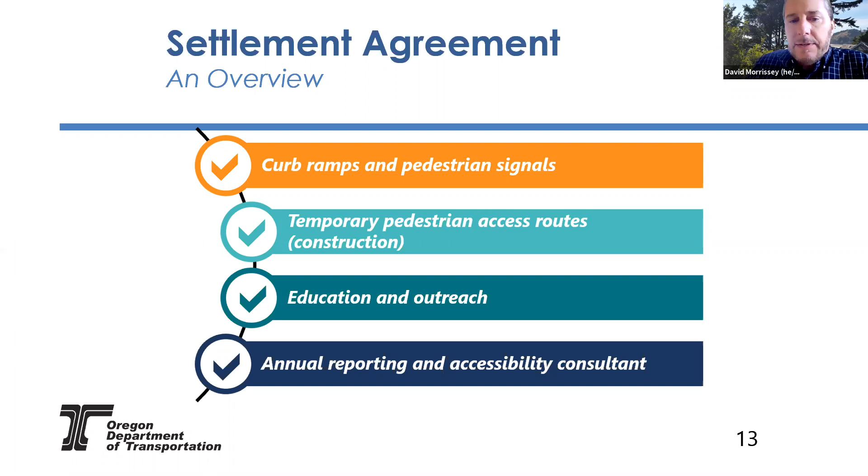And this one's crucial to today's topic: in the settlement, we agreed to assure that we were providing accessible routes through work zones and implementing a mechanism for people with disabilities to identify and resolve issues with our ADA facilities. This is what we'll look at in our next slide around comments, questions, concerns, and requests.

ODOT's actively pursuing all the commitments in our settlement agreement. Just as of last week or the week before, our annual settlement report of the progress we've made in implementing the terms of the settlement went live on the ODOT website. That's submitted every year on or around March 31st, so the 2020 activity year report is now on our website.

So in closing on this slide, I think I'll say that meeting our commitments to the settlement agreement is a commitment the agency's made. We're working hard toward that goal of completion of all terms of the settlement by 2032.

However, our commitment to accommodate all users will continue well past that. So if you could move us to our next slide, please, Jeannie.

So I mentioned it a moment ago, our ADA CQCR system: comments, questions, concerns, and requests. This is our customer input portal, essentially, where using our 855 hotline or our online web form or other ways like Ask ODOT, or just emailing me or contacting a staff member who will route the information up to the Office of Civil Rights.

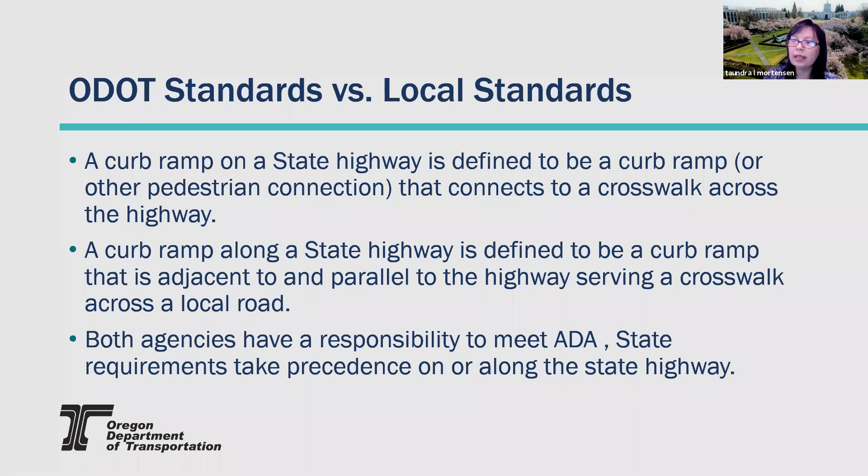Next slide, please. So on or along the state highway, ODOT's curb ramp process is to be followed. We have ODOT forms for checklists for the DEs.

We have a process document that's available online. All of our inspection forms are specific for ODOT and go into our database related to our asset on curb ramps, as well as the ADA design exception form. Those are all available on the engineering for accessibility page and need to be used when we're doing infrastructure on or along the state highway.

So when it's on a local street, ODOT's process must also be followed unless the agency has been certified to deliver ADA. And when they're certified, the agencies have agreed upon forms and processes that are to be followed.

We're having a little bit of an issue that I need to reiterate a couple of times: you must submit our curb ramp inspection form for anything on or along the highway, and it needs to go through the email process. There's a submit button on the form, and it will generate a ticket confirming we've received it. Before we close out a project, we need to have that inspection form. So that's the avenue that our employees receive the form.

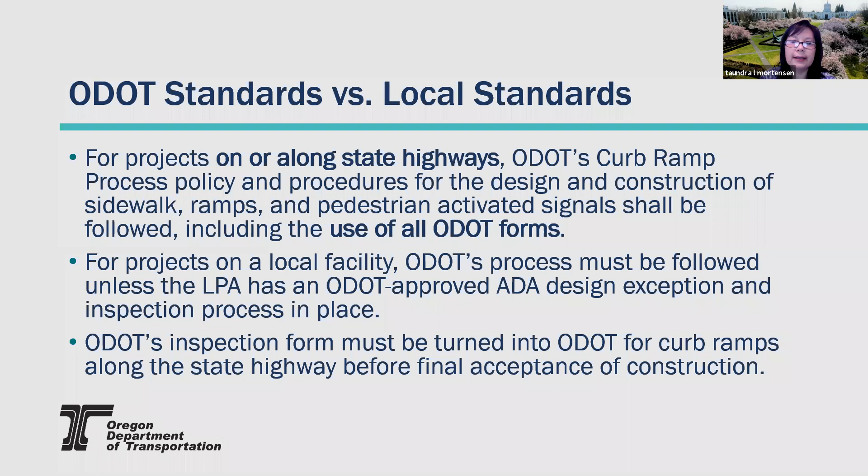Next slide, please. So when an agency is certified for ADA delivery, the agency agrees to follow the standards section of the local agency program agreement. When the project's not on or along the state highway, utilizing federal funding, including portions of the NHS system, you're going to use the processes approved by the state and federal highway.

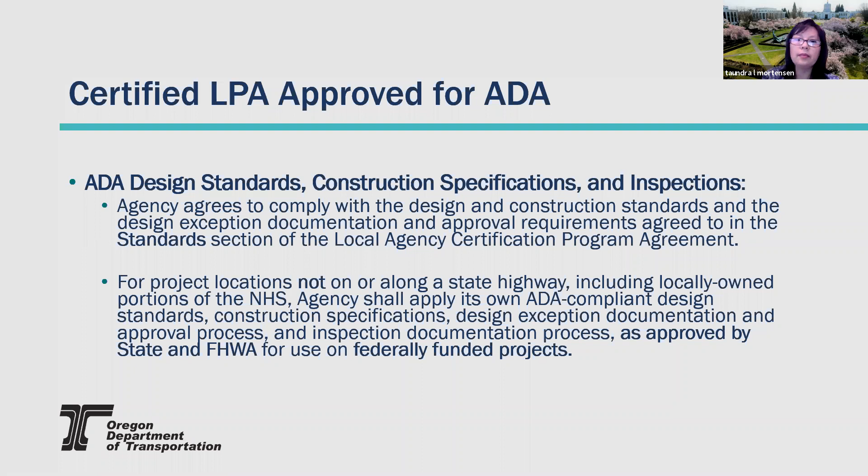Next slide, please. So when you are a certified agency with the design exceptions, when you're building infrastructure on the local facility, the DE is approved by the local agency and retained on file in your project records. When the facility is on or along the state highway, it must come to ODOT and be approved by ODOT and federal highway if required.

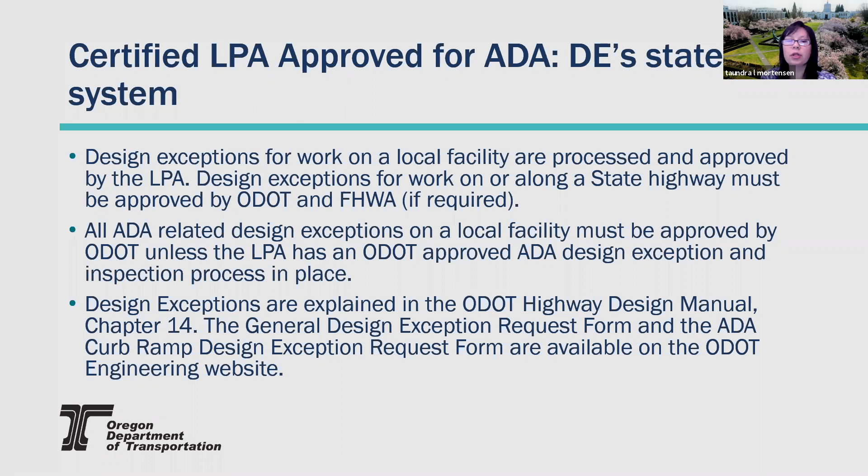On the general form, we do record some ADA design exceptions. These would be things more like sidewalk geometric requirements, and there's a separate checkbox on the general form to do that. I'll talk about what needs to be recorded on a general form versus an ADA curb ramp form. Look at the design exception page in the HDM, and if there's ever any question about which form to submit, please contact our headquarters office. We have contact names and numbers on the webpage to help ensure you're getting the right form submitted.

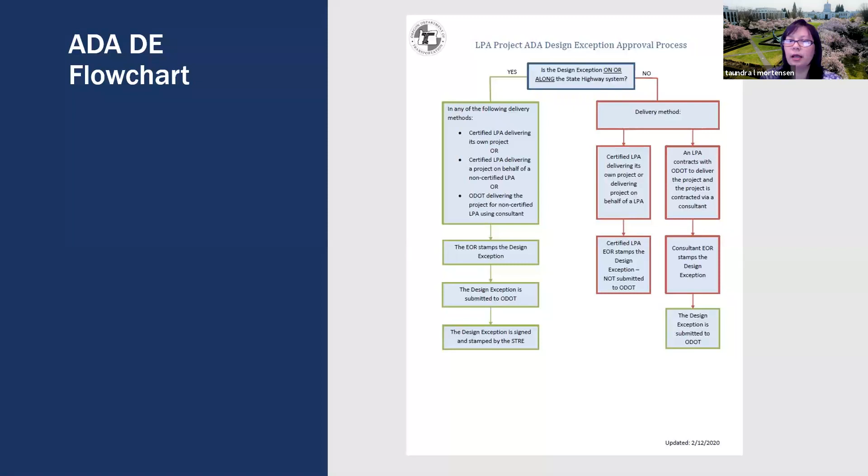On this slide, we have a flow chart for the design exception process. Follow the left side if you're on or along the state highway, and the right side if the facility is not on or along the state highway. If an agency is delivering its own project, or on behalf of an uncertified agency, or ODOT is delivering for a non-certified agency, you're going to submit the request to ODOT. Submitting a request is not a guaranteed approval, so I suggest early coordination with ODOT as soon as an issue is identified. You can contact me; we may have one of my team members help respond, review the drafts, and make sure you've got the information needed to process a request. If it's not on the state highway, follow the right side, and the local agency prepares the documentation and retains the records.

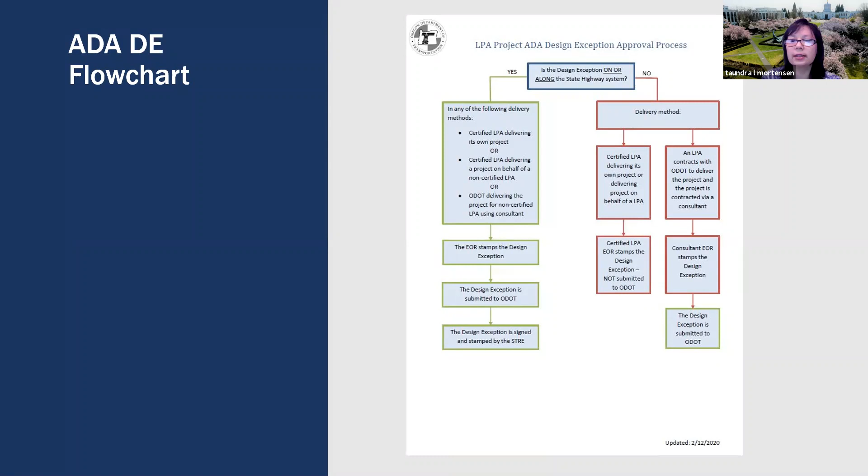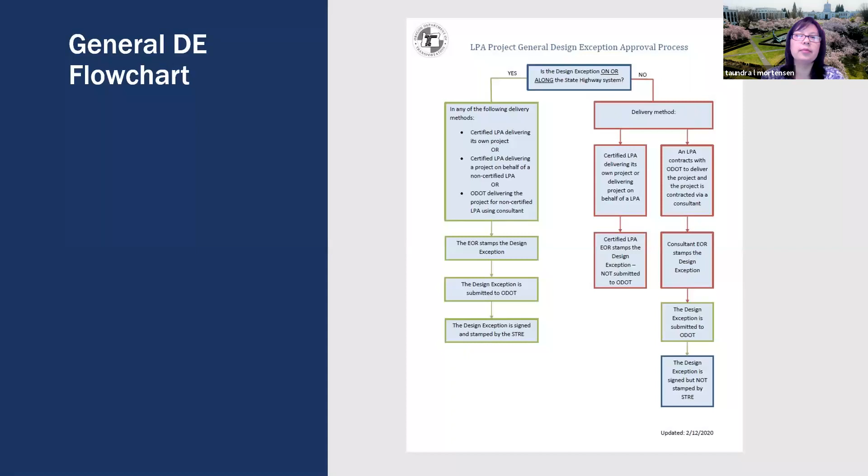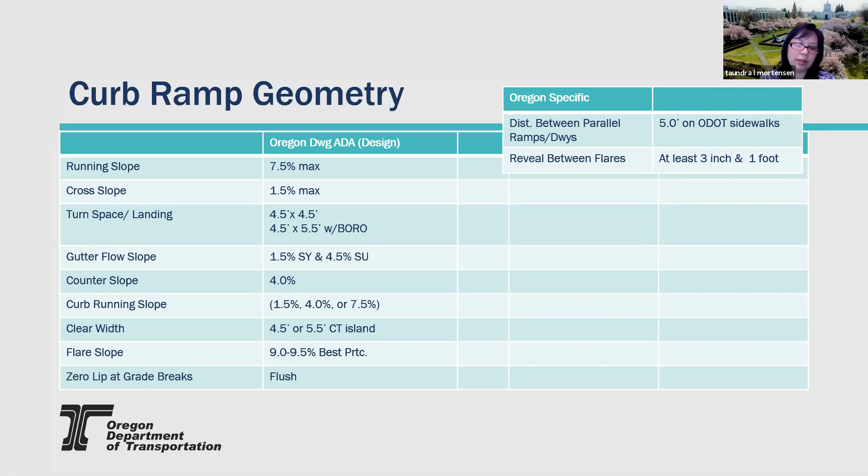A couple things to note that are very specific to Oregon and not in the PROWAG or ADA standards: we historically provide 5 feet of separation between ramp runs and driveway panels that are effectively ramp runs. We also provide at least 3 inches of curb reveal between two curb ramps with 1 foot of separation. We don't have design standards, and we see people designing to say exactly 12 inches, so half the time they meet that and half the time they don't. I recommend, and we've updated the checklist, to utilize 15 inches of separation as your design value to ensure we meet the requirement we're intending.

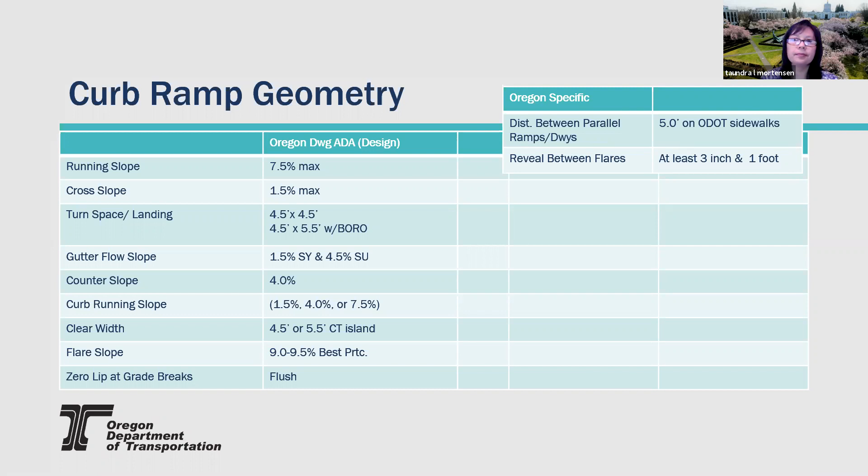On ODOT standards, this is the slide I was referring to earlier—sometimes there's confusion about what we document on which form. If you're not clear, please contact ODOT or our ADA design team. The ADA electronic form primarily captures the attributes of our curb ramp geometry, and we load that information into our database with the curb ramp asset. We're required to track that for our settlement report and agreement—the curb ramp attributes and how many DEs we're preparing. General DEs for ADA would cover items like when we deviate from the standard safety yellow on detectable warnings, if we approve other materials such as cast iron, or try treatments we don't have standards for, such as tactile walking surface indicators, which are more of a guide strip for guiding low vision and blind pedestrians.

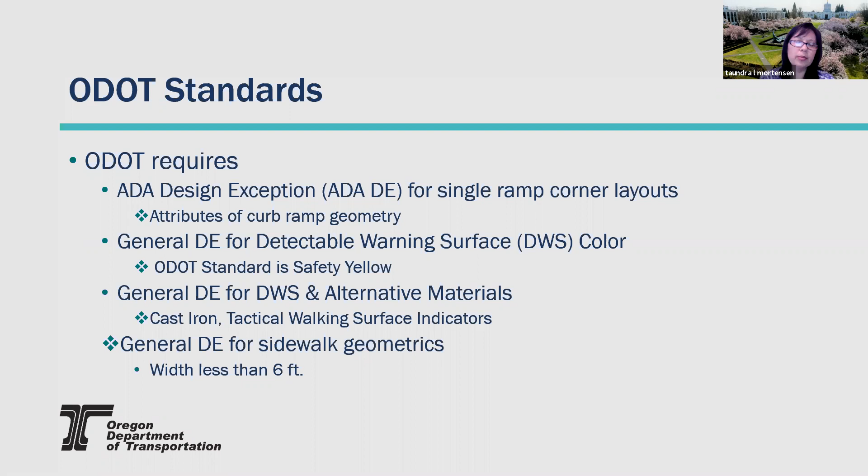So there isn't national standards. There's some reports and recommendations from federal highways, so we are seeing a lot more interest in some use of that. We want to keep track of where we're installing and monitor the performance when we experiment with that. I think there will be more of that coming, certainly over the next decade, and higher use.

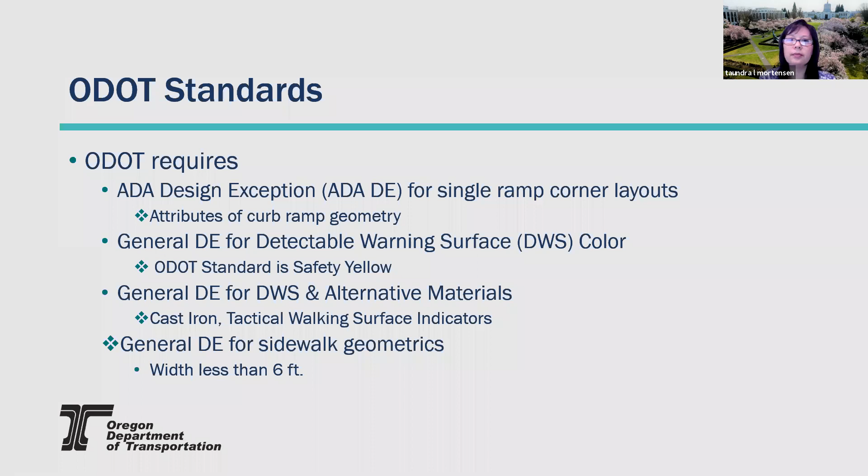And then the other one that's on the general form, again, we talked about our sidewalk geometrics. For example, our new construction standard width is 6 feet, and a DE is required if we don't meet our new construction standard. You can go to the next slide, please.

I wanted to talk a little about something unique to curb ramp design. Not only do we have what most people are familiar with in the design phase, where we document when we deviate from a standard or aren't able to meet it because it was the maximum extent feasible, but we still record anything that is non-compliant. We have a pre-construction box marked on that form, intended for design deviations prior to the pour of the concrete, before the design is done, or if during the contract when you get out and identify some issues, we might need to do a redesign. So there's a pre-construction application, and then the as-built should be pretty rare and is really about documenting final construction that's left in place that for some reason we weren't able to meet the compliant requirements, and we would document that as well. These really should be very small, and it might be due to a change in site conditions that we weren't able to control. That would be an example of where we would do an as-built design exception.

When there is something in the site that is revealed and we're not expecting it, please, please, please start working early with your engineers and notifying your liaison that we may have an issue, so that we can work on the steps forward and make contact with the engineer of record. They may have some additional information.

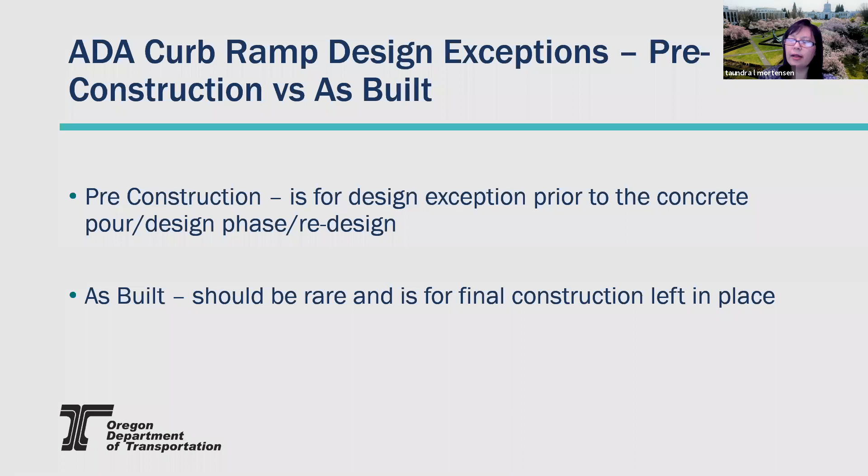So I think that's what I have about that. Let's move on to the next slide.

The other thing that's unique to the ADA curb ramp design exceptions form is that it must be electronic. We have a large volume that we are processing, so our form is set up so that it auto-populates and loads into our database for design exceptions, and can eventually populate our asset information with updated information. So it is required to be submitted electronically. It is also required to be digitally sealed with the engineer of record stamp. Ensure that your digital seal meets OSBEELS's requirements - it doesn't obscure any of your professional record information, such as your license number, expiration date, or portions of your name. It must also include the phrase 'digitally signed' where you would normally sign your handwritten signature on a wet seal.

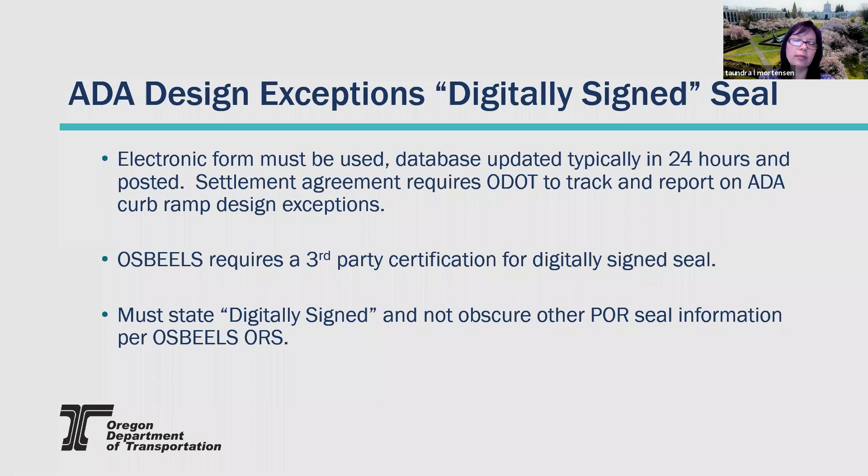OSBEELS also requires a third-party certification for digitally signed seals, and I would warn that there is a little bit of a cost using digitally signed signatures for the agency as well as the person submitting. I would highly recommend that you utilize a draft review process through our office and region before submitting, so that we can just - we found it's easiest to provide comments and feedback, and then you can copy that information into the electronic form and submit just one time. We don't have to continue to send it back if we have some comments, or we're missing some information, or find some errors in the document. You will be sent a link when it's approved that you can access.

Thanks for advancing to the next slide.

So this is a direct snippet from OSBEELS on the requirements for digital signatures. I've covered the basics of it, but you can navigate to OSBEELS and read a little more about the issue. I believe our technical pages also have some information about digital seal versus digital signatures, like on an Adobe form. So there is a difference between the seal requirements versus just a signature on a document, like a Word document that you might be signing.

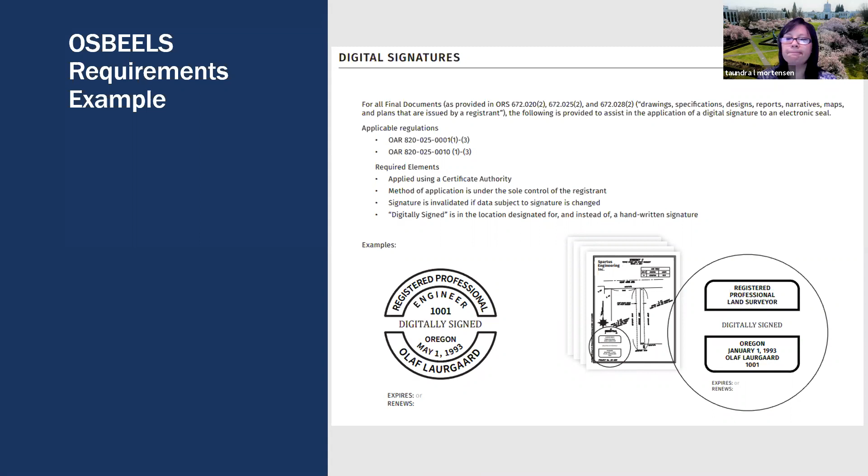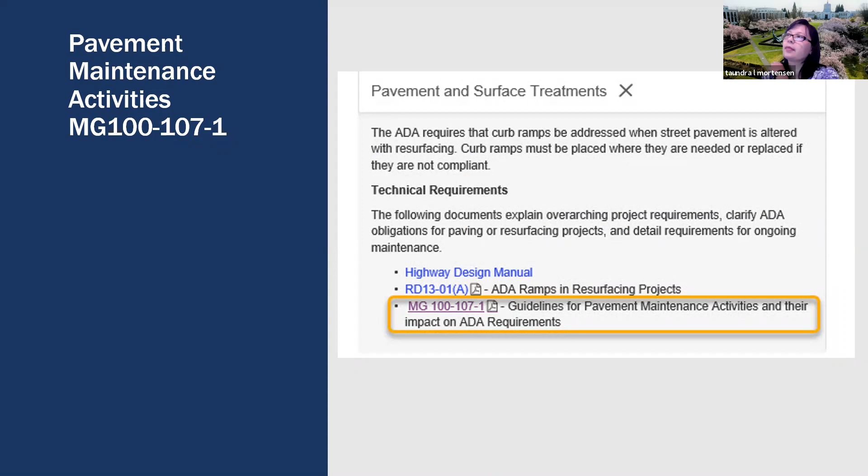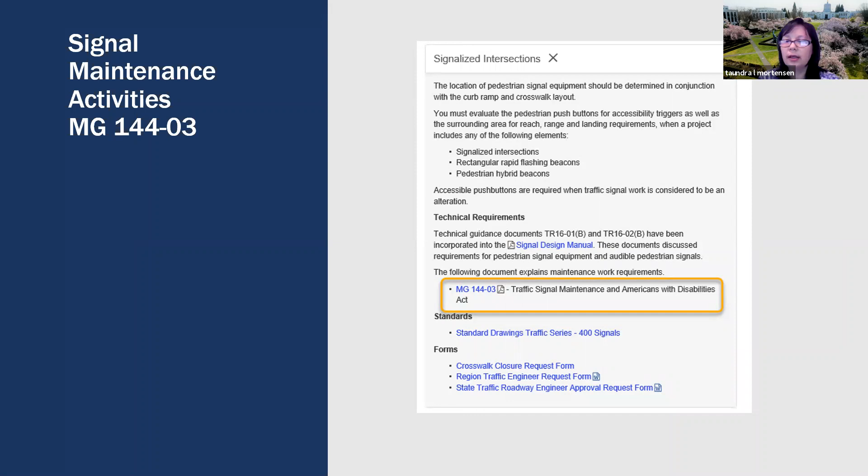On the signalized intersection, there is an MG 144-03 that talks about signal items, describing maintenance versus alterations, which trigger push button upgrades, etc.

So on the crosswalks tab, you'll find the forms to process requests for the state traffic roadway engineer on potentially closing a crosswalk and some of the other approvals.

The policy I wanted to highlight that's recently been published, and you're going to want to get familiar with, is where the locations of crosswalks are on the state highway. It was just posted and effective in February of this year. It's a 16-page document with various scenarios, and I think it's very informative.

You will see something in there related to directionality and our desire to keep crossings and the curb ramps directional. There's discussion about a 15-degree skew angle when we're looking at some of these closures, and that's referencing the center line alignment, essentially, of the curb ramp position 1, or the one that you would enter and exit into the street. That's what that's referring to. If you have some more questions about that, you can contact me or one of our ADA team members.

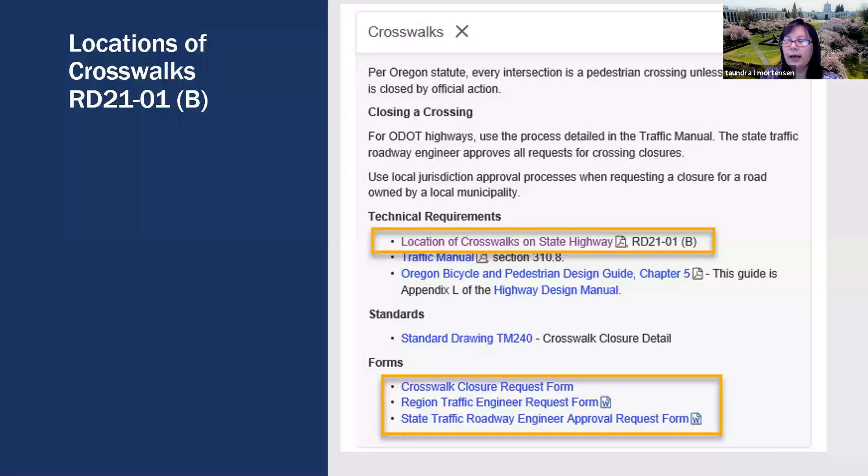Per Oregon statute, every intersection is a pedestrian crossing unless the crossing is closed by an official action. You may want to adopt our policy on where crossings are. Again, we've got to make sure that the sidewalk and crossings are available so that users can enter and exit the facility. I think it's been a bit of a learning curve for folks to understand the triggers with the pavement.

But the other one we're seeing is we're getting lots of questions about when the sidewalk is altered. Just remember, it's kind of the same idea - if you're altering the sidewalk, you're needing to address the curb ramp at that corner location. And any closure must have an official action on file.

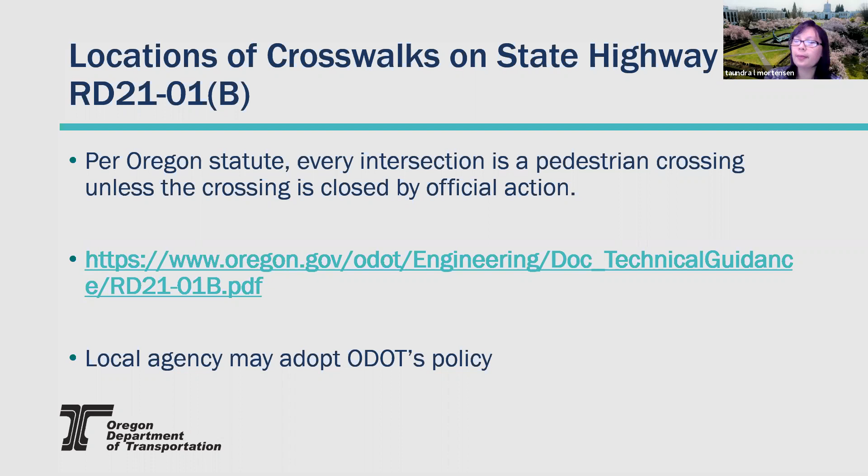This is just a reminder about the processes outlined in the traffic manual for closing crosswalks. When it's on a local facility, the local agency must process the closure for the local street system.

And when ODOT is delivering the project for a local agency, in that circumstance, we will request the document for any closure on a local street to retain in our project records. This documentation essentially serves as our document to not provide 2 curb ramps per corner. So we don't have an ADA DE to code for a single ramp when this scenario, a closure, occurs and is approved. That's the documentation, so we don't duplicate it twice.

We do, however, look to have the information on the curb ramp detail so that everyone's aware that it is closed and that they don't need to provide it. And also on our curb ramp details, we provide any other ADA DEs, a number for all individuals so they can reference that document for construction, inspection, and design review.

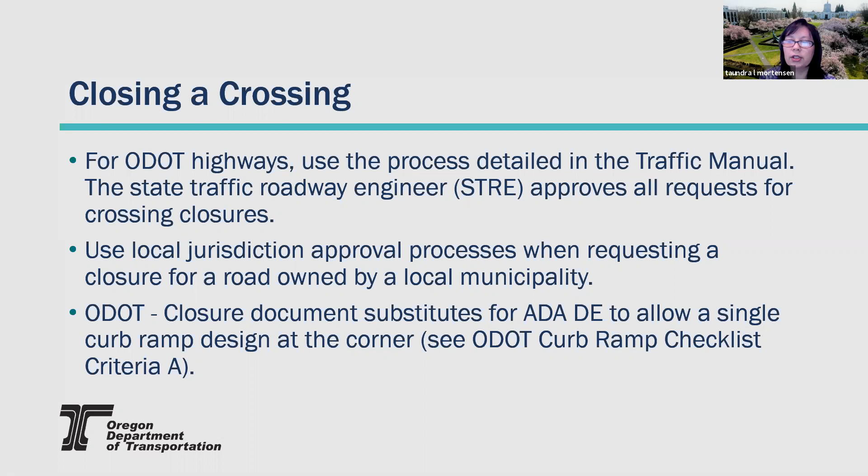Curb ramps, again, aren't to be blocked by parked cars, and the curb ramps are to fall within the crosswalk. Oregon law prohibits parking within 20 feet of a crosswalk, on the leading end and trailing end, which includes mid-block crossings. We have utilized curb extensions, which can be helpful for both the curb ramp design and helping enforce the prohibition of parking at the corner.

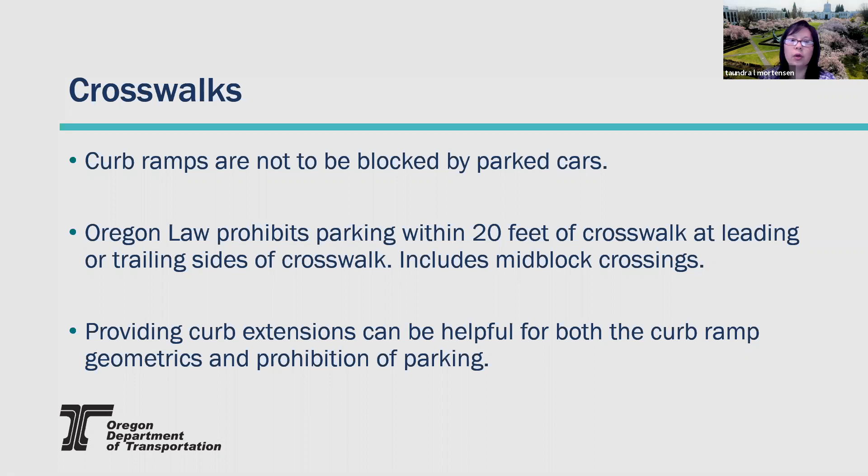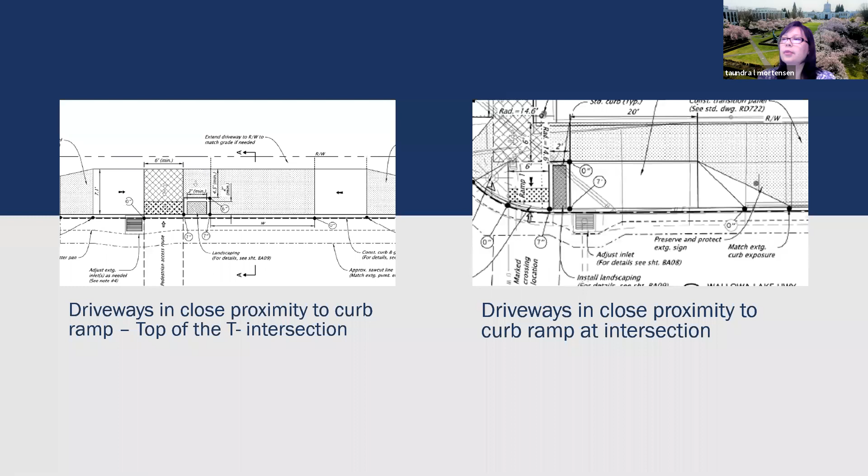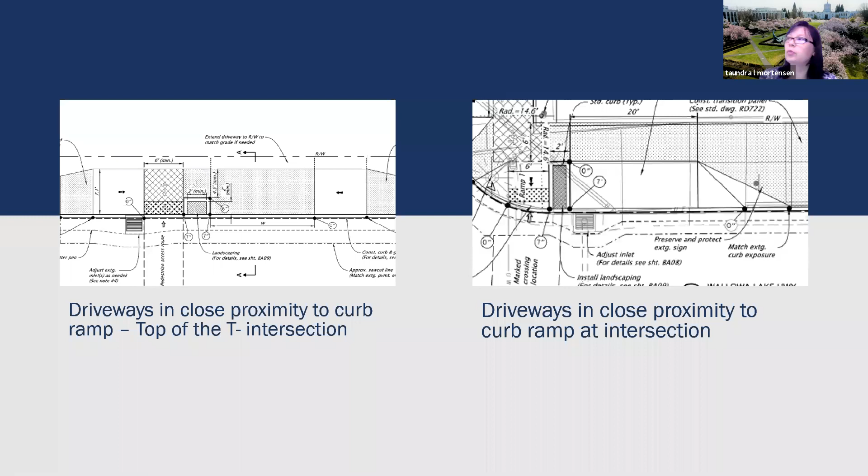This is an example of a couple of installations we are trying. Curb ramps serve pedestrians to access a facility, and driveways serve a vehicle accessing the adjacent property, so they have two different functions and should be designed separately. But we know that in a lot of our intersections they're in very close proximity. The illustration on the left is a concept we've been trying, providing a little bit of a raised curb reveal between the driveway throat and the curb ramp throat. On the right is another example where you might integrate the driveway configuration into a curb extension and still provide separation. So if you have a driveway very close on a corner, consider incorporating that access in the curb extension.

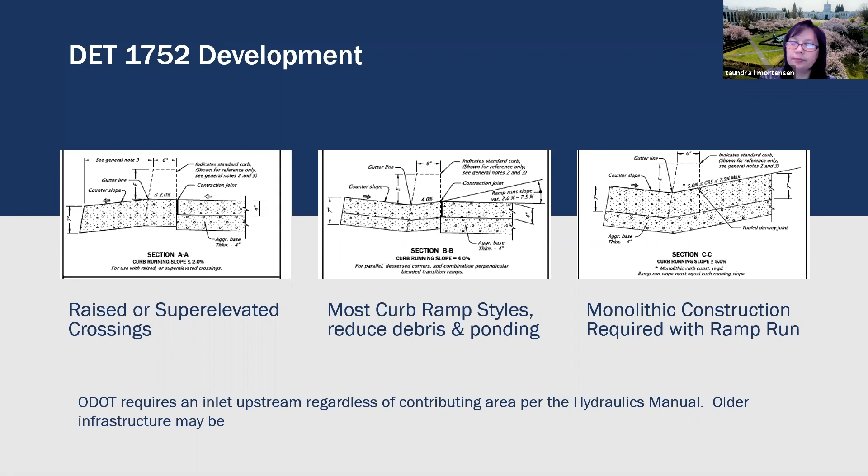The other thing is we're finding that bridge joints need more attention in the access route. The surface requirements really should be flush. I know that may not always be feasible, but we need to ensure we don't have gaps exceeding 1/2 inch in the direction of pedestrian travel. There are some geometric requirements in the ADA standards and PROWAG about level changes when we need to utilize that for some bridge joints. So contact our bridge folks or our unit if you have questions on that.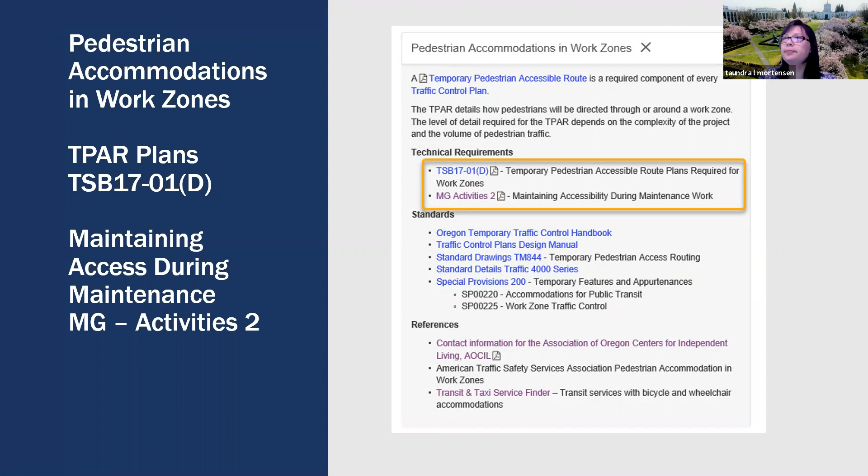So as we talked about, temporary TPARs are a critical element for traffic control that includes bicycles, pedestrians, and ADA accommodations through the work zone. And they need to be equal to or better than the existing access prior to construction.

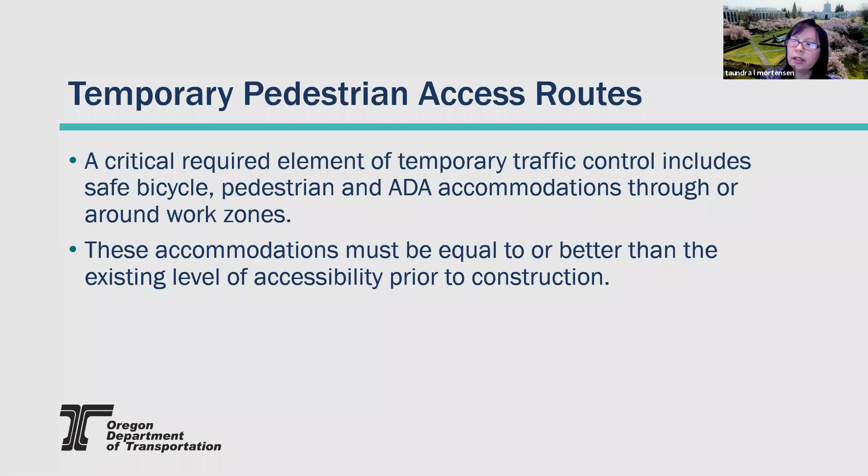There's another very meaty section here on curb ramp inventory and inspection. There's a reminder that there's online training, something we added fairly new. If you need to check if someone is certified in ADA as required by the contract, we have a list of certifications maintained by our construction unit.

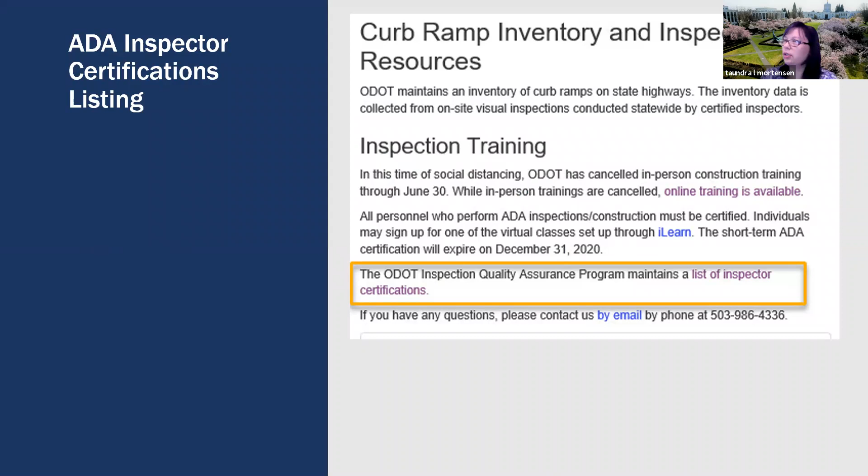On the expanded tab, we have the frequently asked questions about curb ramps and inspection. We had a lot when we rolled out the 2020 class. There's the tech bulletin about measurement criteria when a DE is in place. The submittal guide is new, walks you through the steps on how to submit the form. There's also one for the push button. We have references to the exhibit and numbering curb ramps in our methodology, and also for the push buttons, the type of surfaces, another little handout to help make it easier.

Reminder, the curb ramp inspection training is available. It has about 10 units, one of them is an exam. The certification is valid for 1 year. We'll resume some on-site training when we are able to based on COVID, but currently everything is online.

And we are developing a pocket guide that's not available yet, but will be available for print, just as a little field guide that you might be able to take with you on site as some quick reminders for inspection.

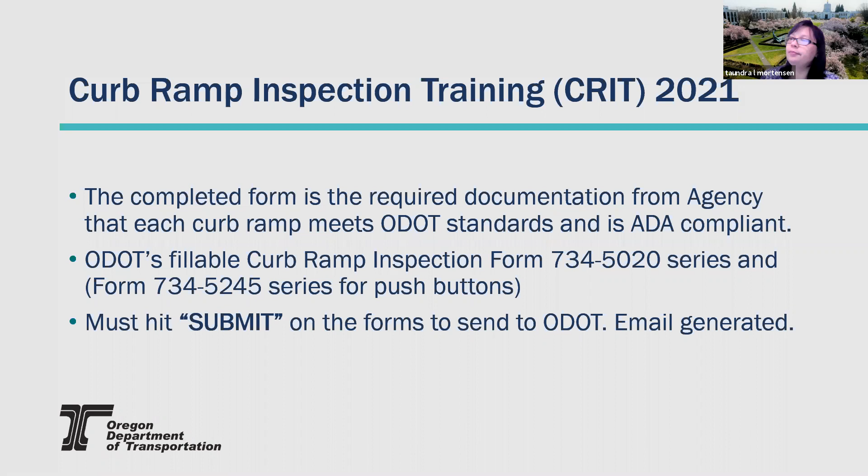We do realize there's a few gaps in training. We developed some courses for our internal staff last spring and a year ago, but COVID kind of threw everything off. So they're partially developed, and I'm looking to get some of this stuff online as soon as I can, so you may see some more materials available.

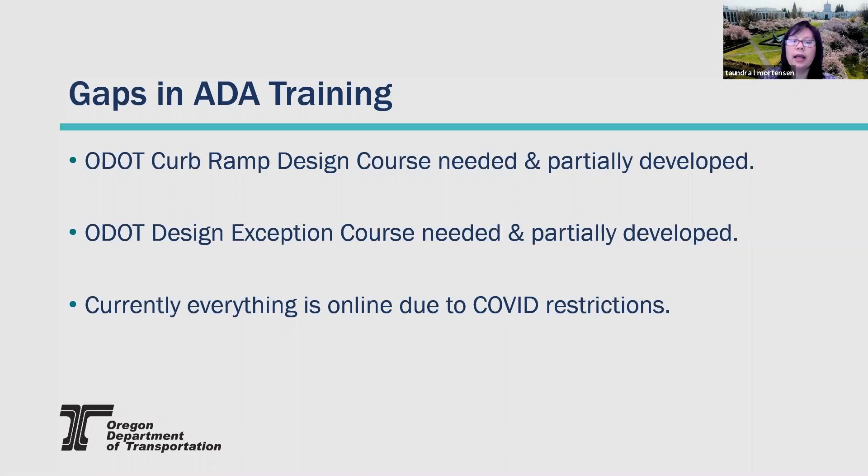One of the last slides here, we're experimenting with some of our pilot projects. We don't have anything that's really resolved or recommended at this point. We're looking at cost saving measures in all of the different areas, right of way, PE, and construction. More and more of our curb ramp construction is going to fall into our regular STIP work.

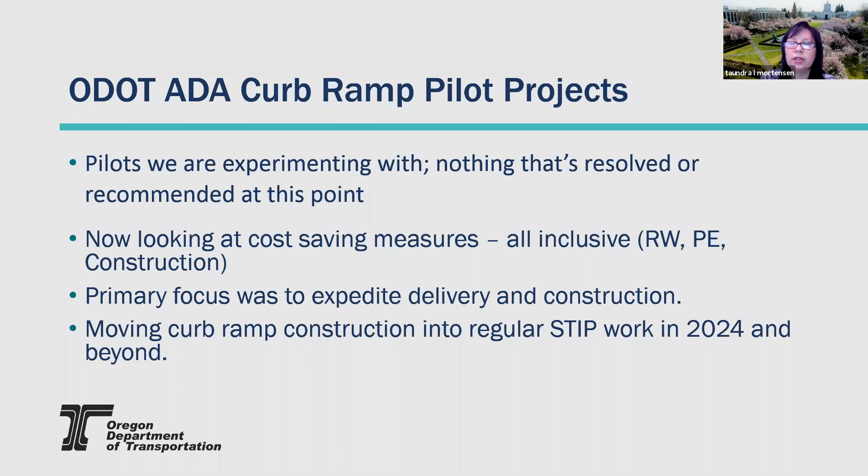If you have suggestions or concerns for the specs or standards, we have two links you can submit information to. They will get to Will Woods, our senior standards engineer. You will see some periodic emails from me if you are on a subscription list that I have specifically for ADA. My email's on here and you can request me to add you to that list. I typically title that ADA forms, guidances, and best practices, so if you'd like to be on that, send that to me.

That's everything I have. So thank you, I know that was a lot.

Just a little TPAR history, nationally and in Oregon. In 1973, the Americans with Disabilities Act was introduced. I believe that became law in 1991 with the ADAAG. Also during that time frame, PROWAG was kind of introduced. It didn't show up in the Manual on Uniform Traffic Control Devices until about 1993, requiring accommodation of all forms of traffic. It didn't show up in the ODOT standards until about 2002, as far back as I can find.

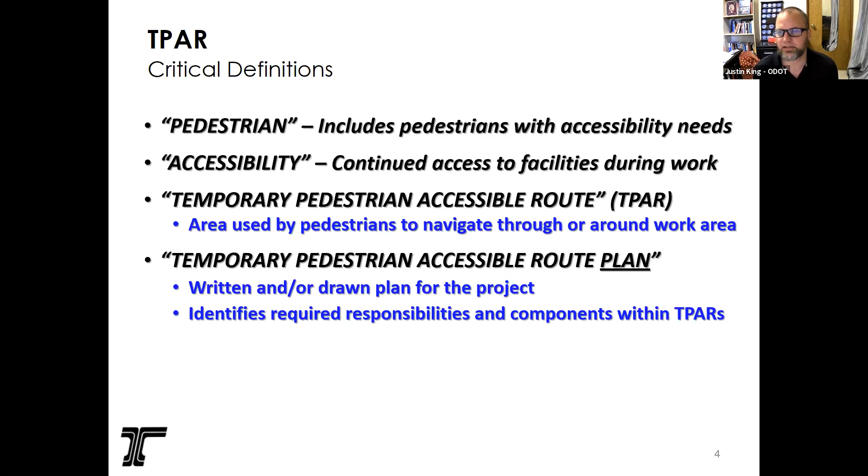TPAR, pedestrian accessible route, is the area used by pedestrians to navigate through or around the work zone or work area. ODOT does require a temporary pedestrian accessible route plan. It can be written, it doesn't have to be an actual plan sheet - it could be a method of stopping work and verbally directing people through, or it can be a drawing that we show and implement. That identifies the required responsibilities and components within TPAR. So a TPAR for a maintenance operation might look a lot different than a TPAR for a STIP project.

For TPAR standards, the ODOT standards are in the ODOT Traffic Control Plans Design Manual. We publish that every year and update it, and those are in line with the MUTCD, covering both design and construction. Basically, the ODOT standard is to provide equal to or better level of accessibility. So if the current level of accessibility is like a sidewalk, you've got to provide something that looks like a sidewalk. But ODOT owns a lot of roads that do not have sidewalks, so we had to find a way to accommodate those areas. It's not necessarily always ADA compliant per PROWAG, but no new barriers to accessibility.

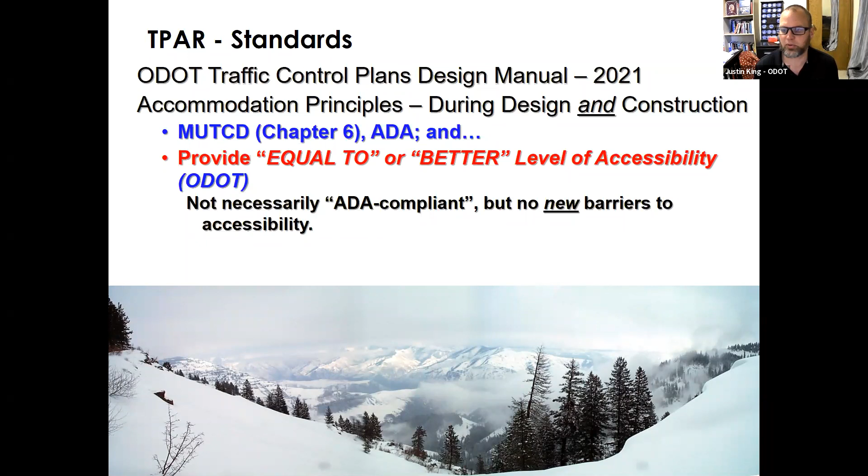So full standards is kind of what Chandra covered. If your existing facility is in a town and you have sidewalks that all meet standard, then you're effectively meeting that same standard in construction. So it's going to look like a 60-inch width path, like a standard sidewalk, with ADA compliant ramps - you can go down to 48-inch width paths with 60-inch passing spaces every 200 feet. It's important to have ADA compliant ramps, and also to consider the separation between the path you're routing pedestrians on versus traffic, and that path versus the work area. There are different devices, concrete barrier or a PCD like you see in this picture, that can do that job. And that path needs to be continuous - there shouldn't be any gaps in that path.

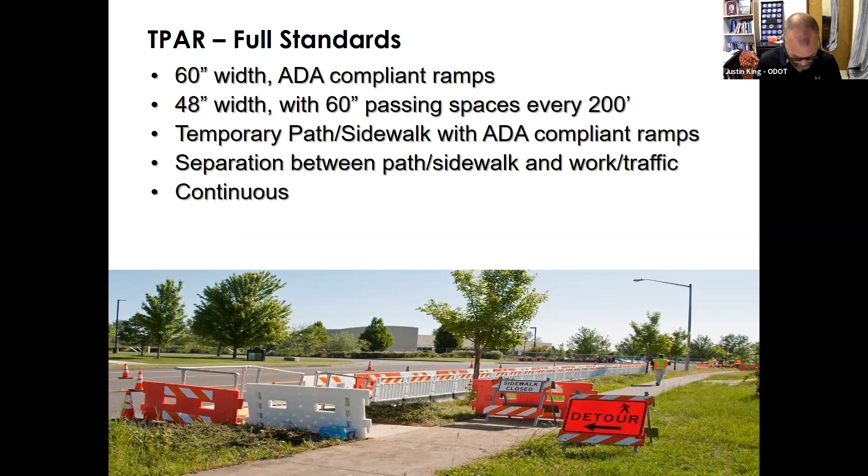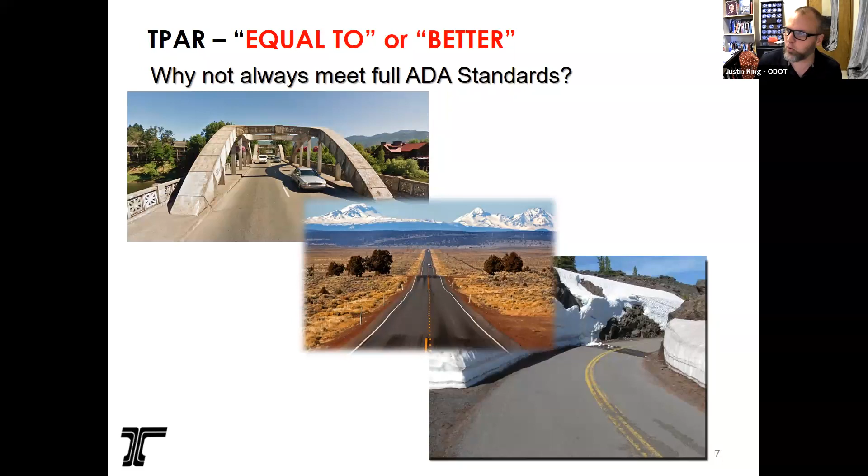So why doesn't ODOT always use the full standard? Because we have a wide variety of highways. This might be different for a city where your whole network is sidewalks, but counties are going to have rural county roads, and ODOT has the same. In the middle picture, it's just basically a paved shoulder. Up on McKenzie Highway, I don't even know if you can consider that a paved shoulder - it's through effectively a lava flow. But we still have to accommodate peds in these areas, and there's lots of bikes up there too. Some of our existing infrastructure, like the Caveman Bridge in Grants Pass, doesn't meet full standards for the width of the sidewalk, and it would be very difficult to meet full ADA standards there and get people off. So that's really why we had to find a different standard than just full - equal to or better than, with no new obstacles to accessibility.

The TPAR should be equal to or better than, matching that existing level of accessibility. If you can't, then you need to provide an alternate method to accommodate peds. That could be a detour. ODOT is also using flaggers to get pedestrians through, stopping the cars and using flaggers to allow pedestrians to get through the work zone, so they have that space available to them.

Some projects have used shuttles. The Oregon City Bridge shut down between Oregon City and West Linn for a year or two, and the project used a full-time shuttle to get people around that work zone. The reason was the detour route was effectively I-205 to get across the river, which wasn't viable for pedestrians or bicyclists. That project worked with TriMet to have a full-time shuttle around the bridge.

It's also okay if you treat everybody the same. So a full closure to all traffic means you can close it to pedestrians too. But if you accommodate traffic by a detour or alternate route, then you also need to accommodate pedestrians in the same form. As long as you're treating people equally and closing the road, that is acceptable.

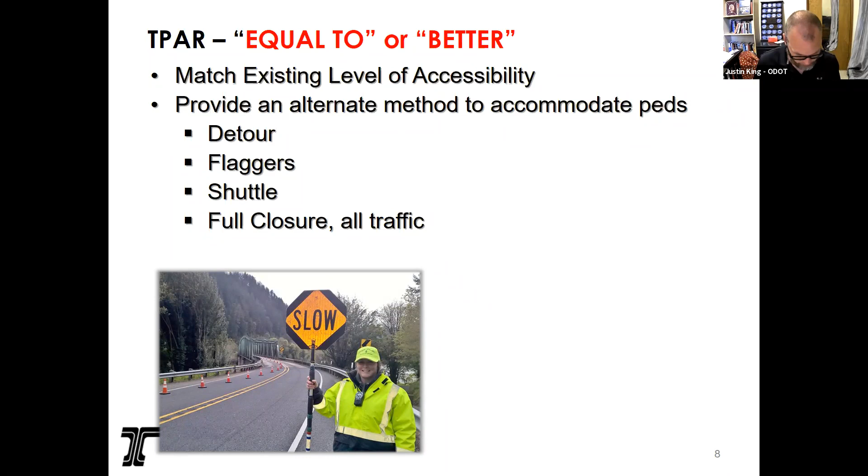There's not a lot of standard drawings out here. There's a couple, but each project is different and is going to require a project-specific solution. That's part of the reason we don't have a lot of standard drawings for this. What we've noticed in the past is that just using the standard drawing doesn't work, so we want the TPARs to be project-specific during design.

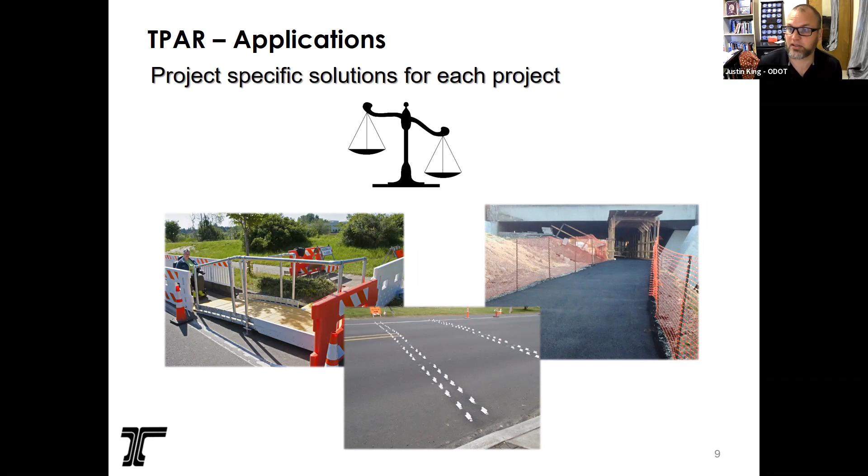It's also important to realize that if the standard is the existing condition, and then once we start constructing, the existing goes away, we need to document what the existing condition was. Otherwise, it could be hard to prove that you're meeting the standard. So it's very important to do that.

A lot of projects get a survey, and that's a form of documentation. If you have photos, or just a video drive-through of the project, it can go a long way to documenting what was there before you started tearing it apart.

Because what's going to happen is if your TPAR does not meet standards, someone's going to come through and say, hey, everyone's trained to meet the standard, this is not meeting the standard, you guys are not following the law. You need to have documentation and proof that says, no, the standard is equal to or better than, here's what was there before, and here's what we're doing that meets that standard.

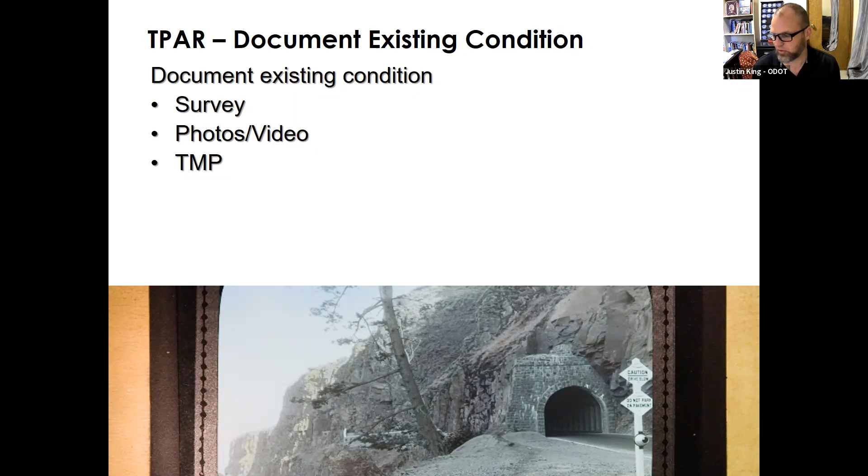The way that ODOT does that is document it in a transportation management plan, so that we have that information available if something comes up.

ODOT does not have a formal process for documenting temporary design exceptions, but we do want those documented in our transportation management plans.

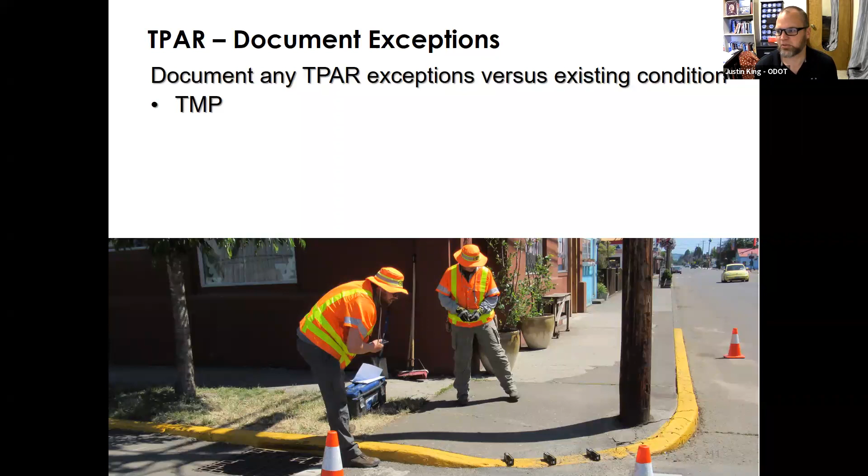Some other design considerations for your TPAR: make sure you do your inventory like we talked about, know what's there, and then if you can, try to find some anticipated pedestrian volumes. If we're in Eastern Oregon, or Southeastern Oregon by Rome, and there's not a lot of pedestrians, we still have to accommodate them, but the solution might be less standard—it's less risky to have a bit less accommodation out in Eastern Oregon than in downtown Portland or somewhere like that.

So if you can, try to get some anticipated design pedestrian volumes. It's also important to know the scope of work, obviously, and then the duration of that scope of work. If you're there for 15 minutes, the TPAR is going to look different than if you're there for 15 months.

Let's also look for opportunities. I know on some of our projects there's a pedestrian path that's a little out of direction, like a park or a little pedestrian bridge. But those are opportunities you can use during your project to route pedestrians a different way, so you don't have to use your project area to get pedestrians through.

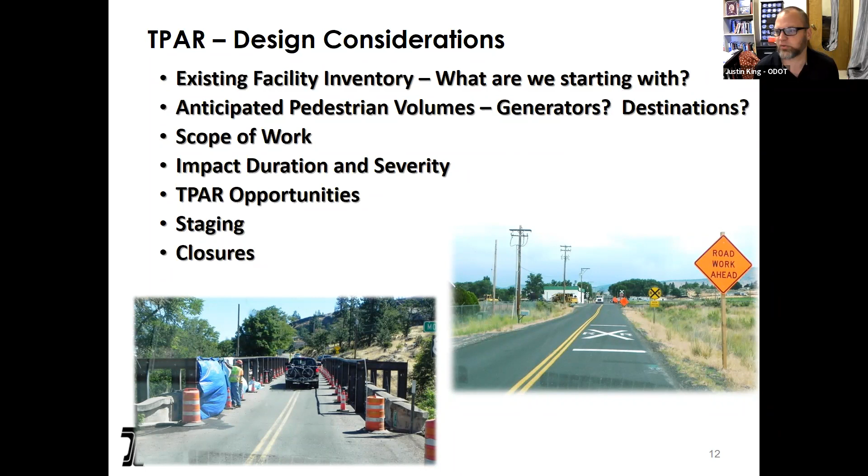One part of the settlement was public notification and outreach. It's important during both design and construction. If you can, through your media or if there's a citizen group or stakeholders, identify those. So if you're in Monmouth and you know there's a community of blind pedestrians at the college, go talk to them and ask what's best for the project. Try to do some outreach during design.

We post all of our projects on a website. Along with the outreach, it's also important that during construction we notify people what's changing. There's a 10-day advance notification requirement, done by ODOT on the web and on site.

I'll show you some of the signs ODOT is using. For short duration, if we're on the sidewalk moving equipment and a pedestrian shows up, we use this top sign. For longer term impacts, we have an advanced sign that says the sidewalk's going to be closed during this time frame, use a detour, or when the detour is in place, an actual sign that says follow the detour.

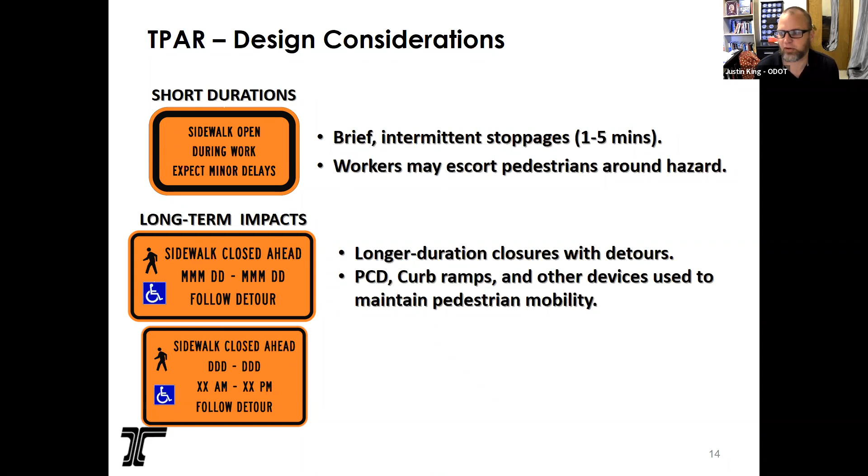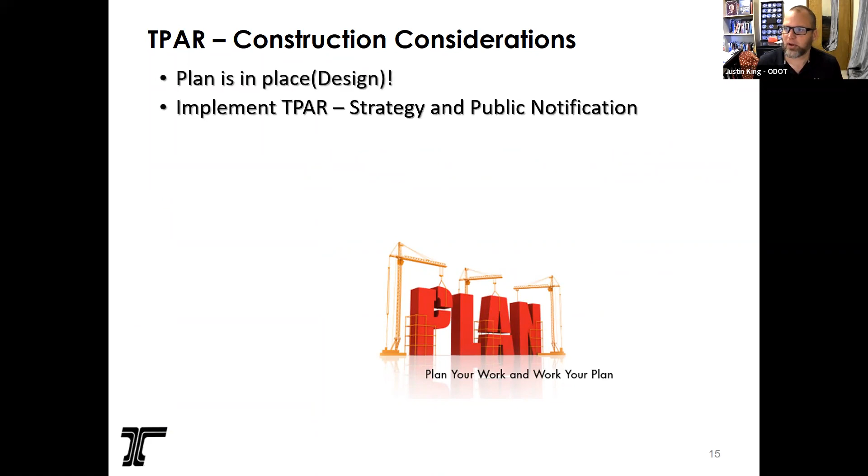So now once the design plan is in place, it's time to work that plan in construction. You've got to implement that public notification strategy.

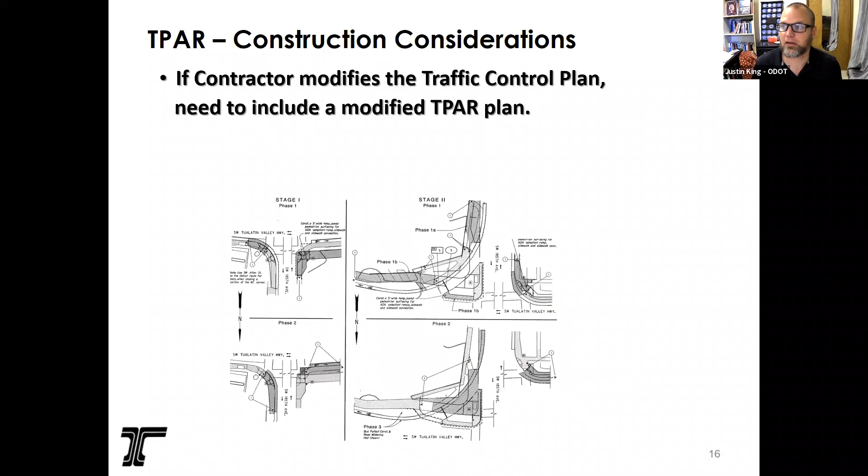One thing important before you get into construction: if the contractor modifies the traffic control plan, they also need to include a modified TPAR plan that goes along with that. You don't want them to propose a different traffic control plan that doesn't work with the existing TPAR. ODOT/APWA specs require modified plans, including TPARs, to be stamped by an engineer. So if the contractor is proposing a different traffic control plan and TPAR, those need to be stamped.

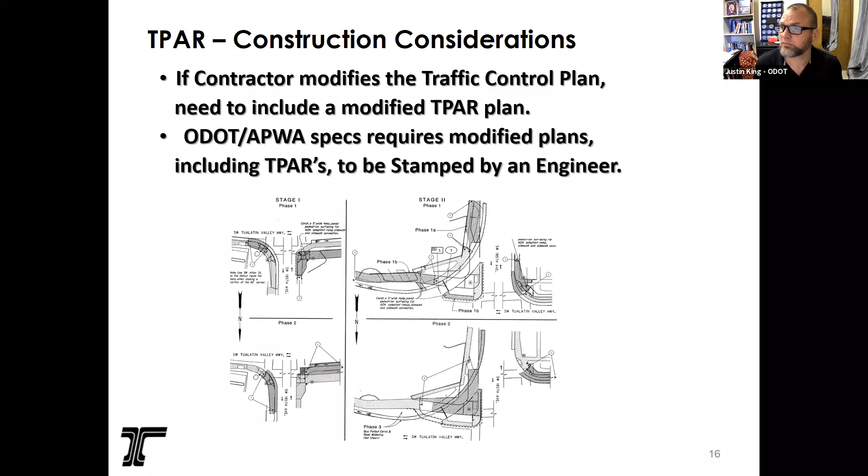Just some construction considerations: a TPAR is required. We came across this project, an ODOT project in region - doesn't matter where - and they obviously just started tearing apart and there was nothing there. So it's important that we have a TPAR, and if there's not one on the project, it doesn't matter, it's still required.

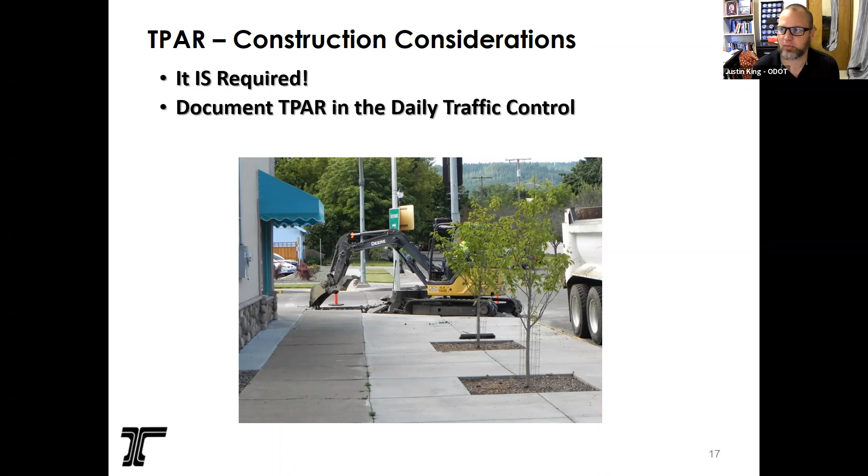It's also important for the inspectors to document the TPAR in the daily traffic control logs and inspection reports, both before and after every shift, and probably during the shift too. When ODOT does a compliance review, they're looking to make sure the TPAR was in place and working. So it's important to do that inspection and document that the TPAR was in place daily and was working.

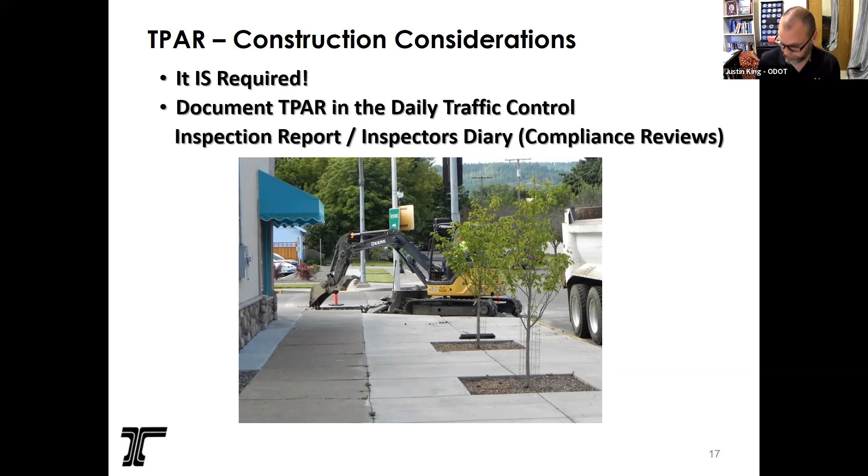A good analogy is: if you have a shopping cart and you're an inspector, and you can walk your shopping cart before the project begins and after it ends through the project, then you basically have a full-blown standard TPAR there.

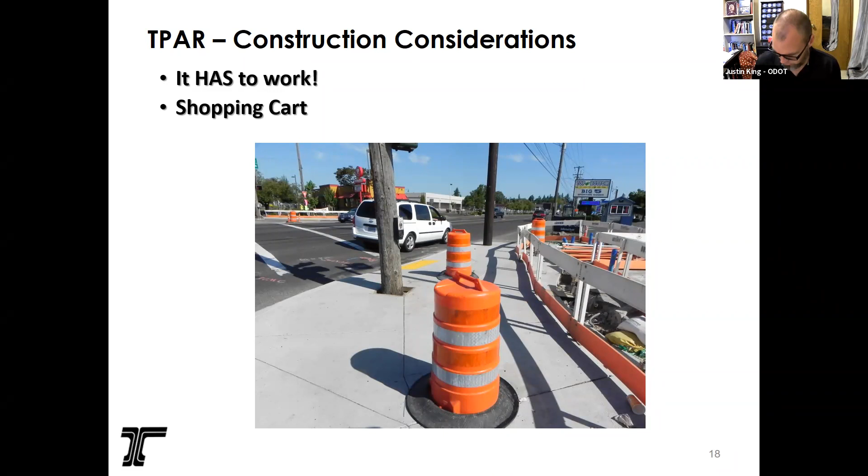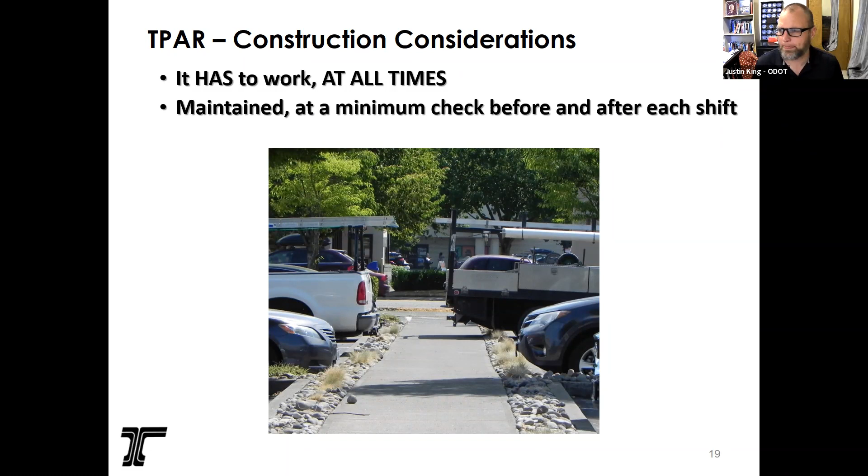It has to be maintained. That's why it's important, especially at the end of the day - because during the day the contractor is going to have to get within these areas to do the construction - at the end of the day it needs to be maintained. That's what we've seen a lot: the TPAR is placed at the beginning of the project and then it's not maintained throughout the life of the project.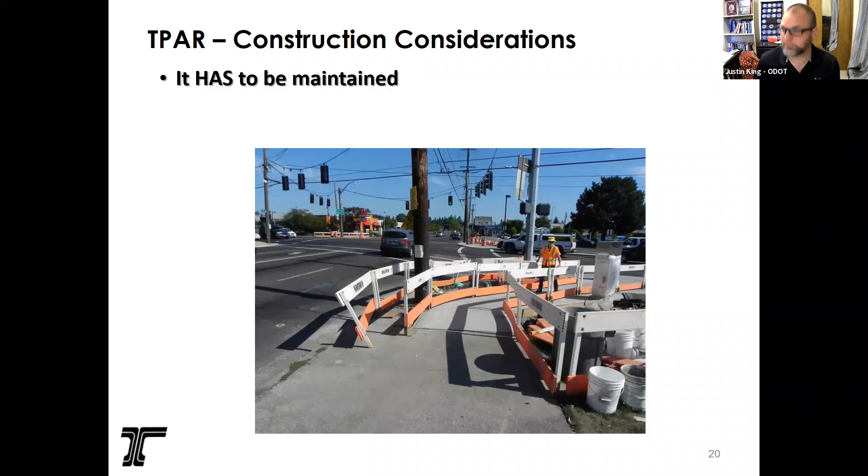It has to be continuous. Obviously here it's a little skinny. So it's important to have a continuous route that meets the standards through the whole project.

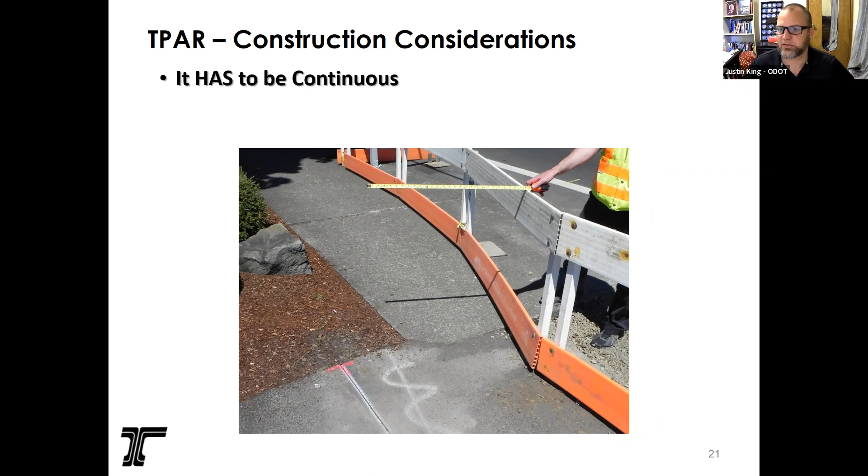Just a side note: caution tape is not an ADA compliant device. ODOT does not condone using caution tape anywhere technically, but if it's not part of a TPAR and you want to keep people out, it does serve a function - but it should not be alongside or used as part of a TPAR.

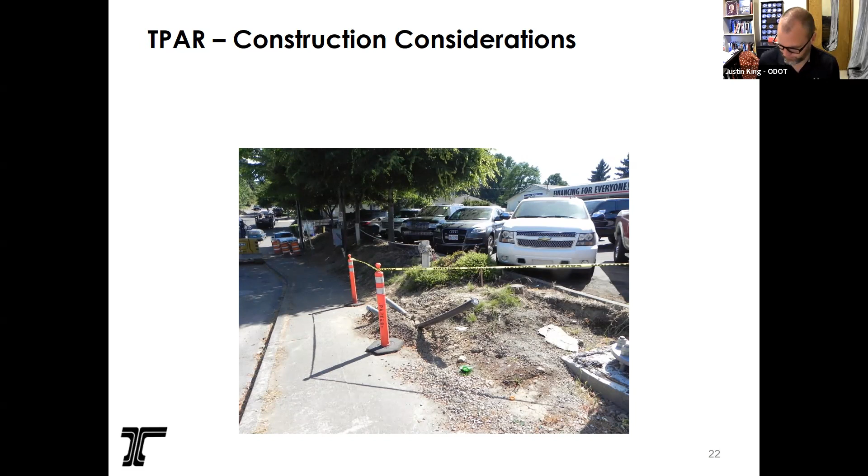So ODOT, as far as TPARs, is using the 3 E's to succeed. That's educating people, so going to these type of meetings and making sure they know what the standards are. And then engineering is putting those standards in our manuals for available use, and everybody's more than willing to use our standards or copy them however they need. The third part, which will take some time, is enforcement - getting our inspectors out there enforcing TPARs. Obviously it's change, and contractors are resistant to change, and even some of our inspectors are resistant to change. But to be successful with a TPAR, you've got to have all 3 of those legs. If just one of those fails, it doesn't work very well.

So just some typical accommodations that ODOT has for TPARs. I already mentioned this one, but on our 2-lane roads, we have a single lane closure. We're using the flaggers basically as a TPAR - so the flagger stops the vehicles and gets the traffic through.

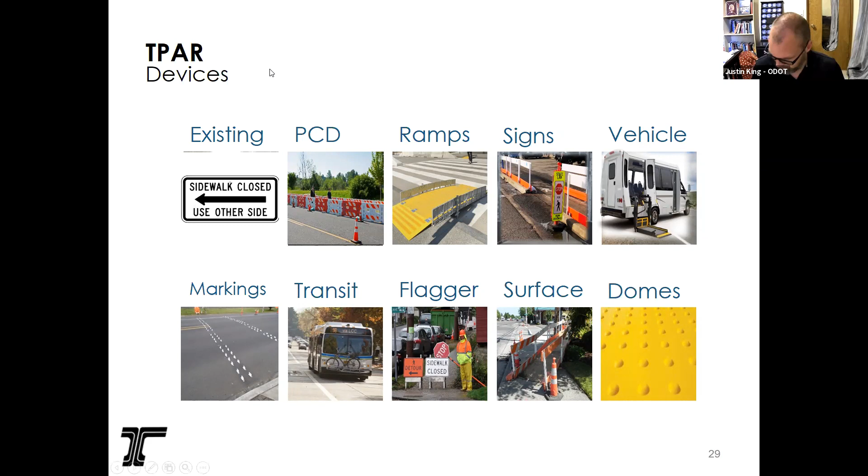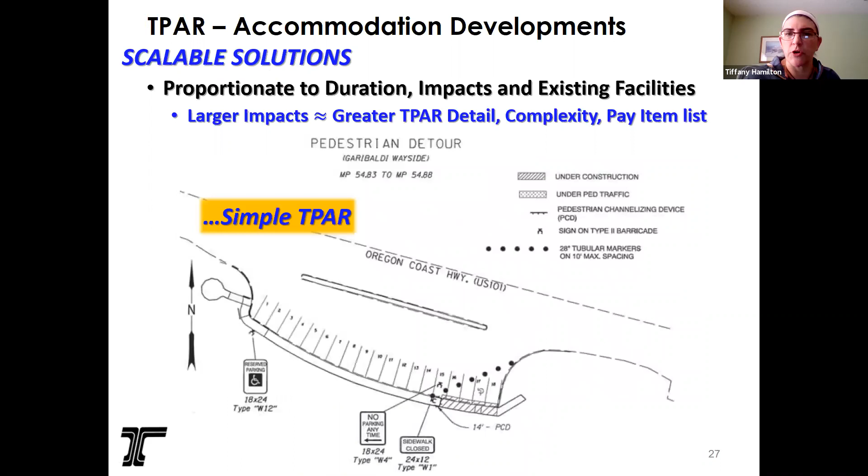Justin, before you move on, we have a couple of questions and comments in the chat about the prior slide. The question was, what TPAR standard drawing was that? And there's a comment saying they believe he showed TM 844 and TM 850. Can you confirm for folks before we get too far past the slides?

Yes, this is TM 844, and yes, this is also TM 850 in our standard drawings. So whoever posted the answer was correct.

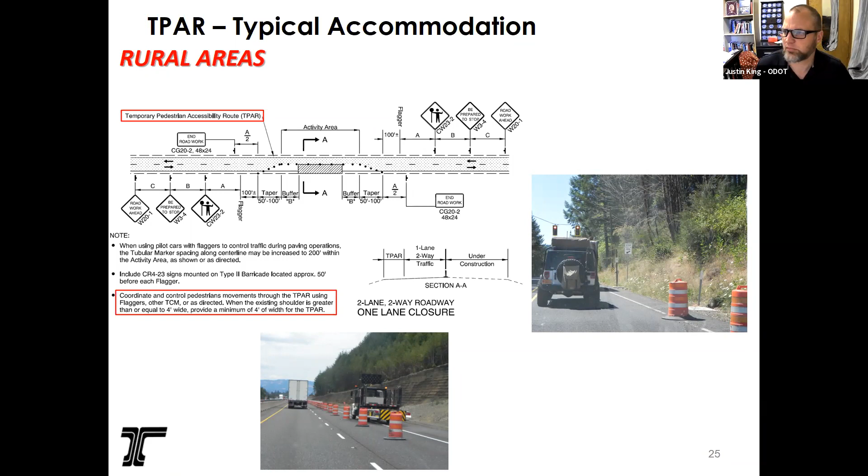Just to review the TPAR fundamentals: equal to or better than existing is our standard, no new obstacles. It's important to do outreach during design and construction, and follow the 3 E's, get the engineering where you need it in design, educate your designers and inspectors, and enforce those standards. It's becoming more and more important. The enforcement mechanism the public has for ensuring ODOT has a TPAR is basically the court system, and we don't want to go that direction.

Some lessons learned: what we see in a lot of projects is a lack of comprehensive, consistent guidance through the TPAR. You get to an area and don't even know where to go. It's important to guide people through, and if you're using PCDs with a couple signs, it becomes really obvious where you need to go. Then there's also a lack of maintenance, unfortunately or fortunately, the TPAR needs to be maintained effectively at all times.

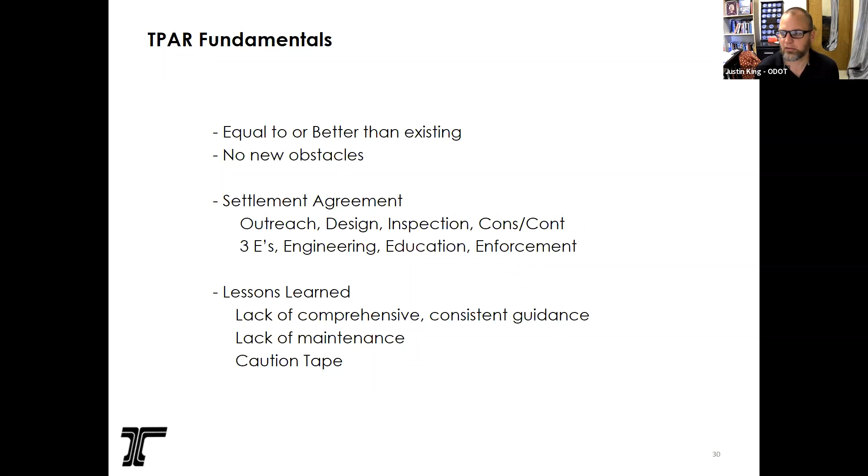What does that mean for an inspector and contractor? At minimum, make sure it's working at the end of every day, that's one of the lessons learned we've had. Also, contractors like using caution tape, but that is not a device that is ADA compliant or should be used near or around a TPAR.

Just some additional information, I think Chandra has already shown the accessibility website for ODOT. We also have all of our work zone TPAR standards on our work zone webpage. I have 3 people in my group, and we all have access to the work zone standards at ODOT email, so you can always email us there and we'll get back to you on an issue. We also have a TPAR meeting, now every other month.

It's the 3rd Tuesday of every other month at 1 p.m. at the ODOT TLC, it's a remote meeting so you can call in, and it's open to anybody, cities, counties, consultants, utilities, traffic control companies have all attended. Basically we go over what's changing in the standards for TPAR, and we also have a section to discuss solutions to projects.

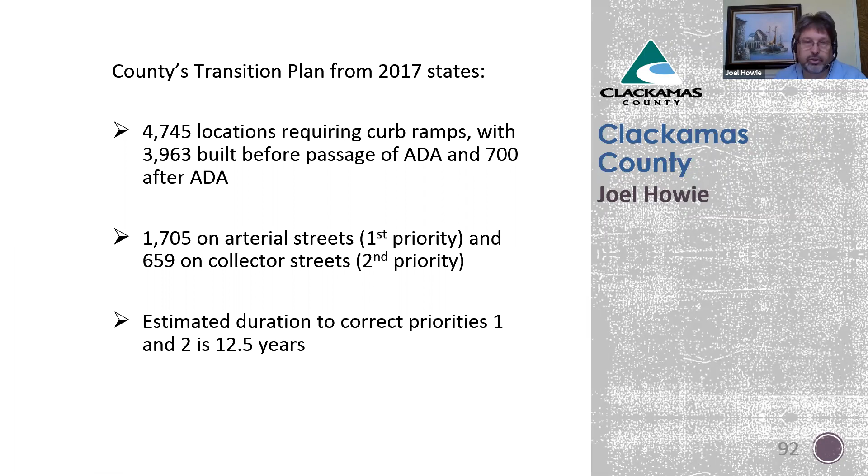We're falling short on the transition plan goals, mainly because of logistics of various things, and definitely high ramp design costs. We're finding for consultant design, when it includes a traffic signal, it's about $7,500 per ramp, and then 2 ramps per corner, so it can be about $15,000 per ramp corner.

I'll show an example where we have 30 signalized ramps that we're working on at Sunnyside. So the total cost is about $600,000. As throughout Clackamas County, the right-of-way isn't always in the place where you think it is, so sometimes we're finding we do have some right-of-way needs just to encumber, to make sure that we're covering the ramp itself. And then the county itself has challenging terrain, hills and valleys and things like that.

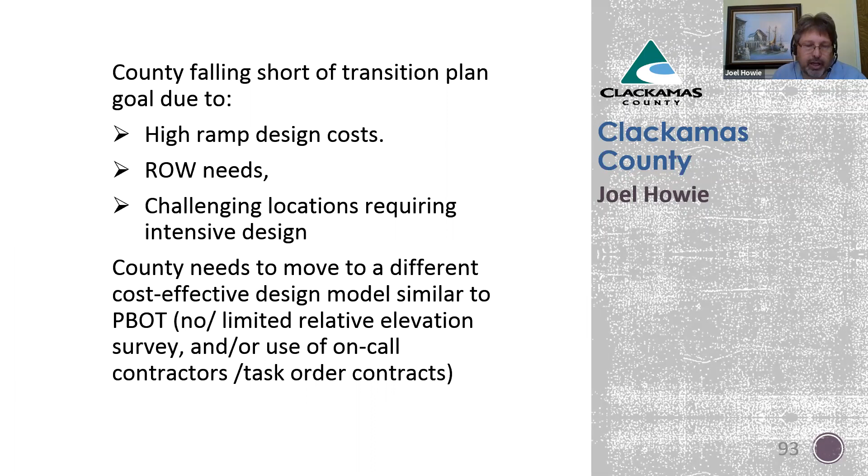So we're looking at another model similar to PBOT, so we can be more cost effective, and some of that will include not actually doing a full-blown survey, but doing relative elevation surveys. And then PBOT also has a model of using on-call contractors and task order contracts and just setting up per unit prices, so we'll be looking at that. Go ahead and go to the next slide.

Other items of interest from Clackamas County: on our non-federal projects, we are using a kind of modified Washington County inspection form, which includes an allowance of a 1/4 inch lip at the gutter/ramp connection. PROWAG does allow that, but the ODOT form pretty much says if there's any lip, it's non-compliant. So we are using that form.

This is mainly driven through developer construction of ramps. Our county process allows the contractor or the builder an appeals process. If the county does determine the ramp is not compliant, the builder can hire an independent surveyor to conduct a survey to demonstrate compliance. We've also used our own in-house survey group to go out and take a total station out there and get millions of points on a ramp, and it's pretty cost effective and easy to demonstrate compliance or non-compliance in that manner.

But typically, if it's a developer, we're going to require them to hire the surveyor. But on our construction projects, we'll use our own survey group. Go ahead and go to the next slide.

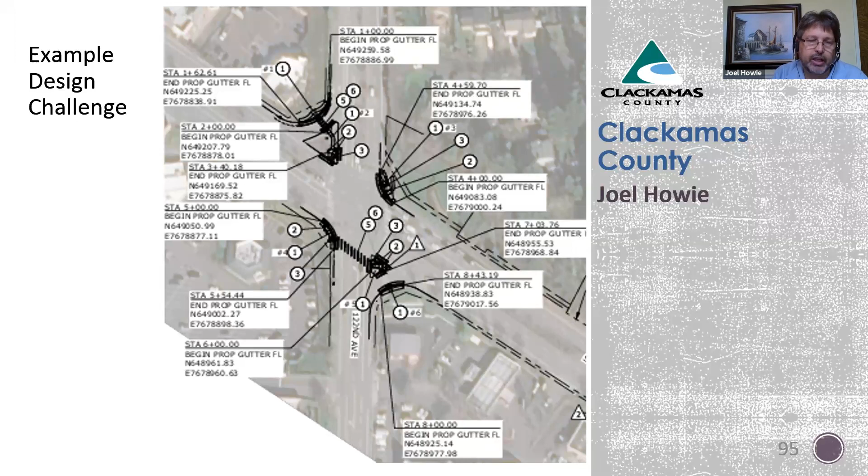So the options at the corner, the existing grades at that sidewalk - this Sunnyside was constructed in the late 90s, and there's really nothing compliant about the existing ramp, but they did their best at balancing all the grades. So one option we were looking at is just adding truncated domes to the ramp.

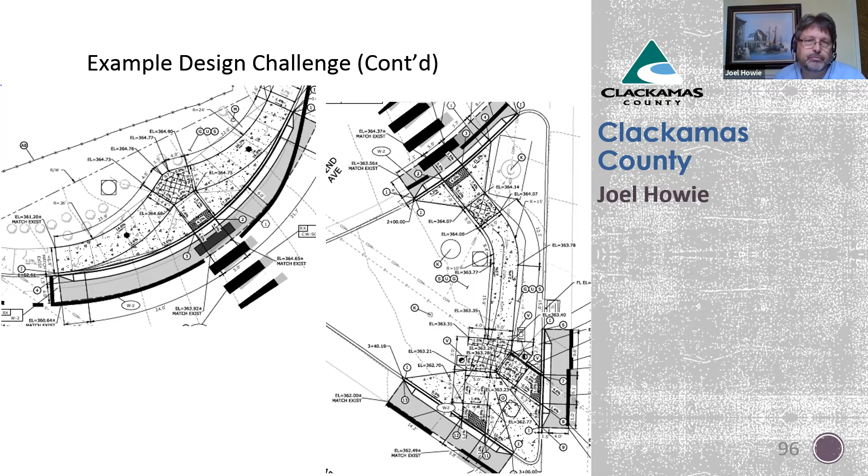First thing I want to cover is the ADA ramps and what we do. So City of Portland is under a settlement with CREEC, that stands for Civil Rights Education and Enforcement Center. It's based out of Colorado. They go around and sue cities for not having compliant ADA ramps.

So we're under a 12-year agreement that was signed in 2018 that runs through 2030, and one of the requirements is that the city's committed to building 1,500 ramps a year. The other thing we agreed to is that we're using the 2010 ADA standards.

I think most of the state, including ODOT, is using PROWAG, so it's a different standard. Another requirement under the CREEC settlement is that we have to do a conditional assessment survey of all ramps in the city. That's still an ongoing process, and we continue with that.

Where we get our ramps comes from a few different sources. One is our capital program, which builds ramps. Another major source is through development. The third is we have utilities that, when they come in and destroy a corner, end up having to put back compliant ramps.

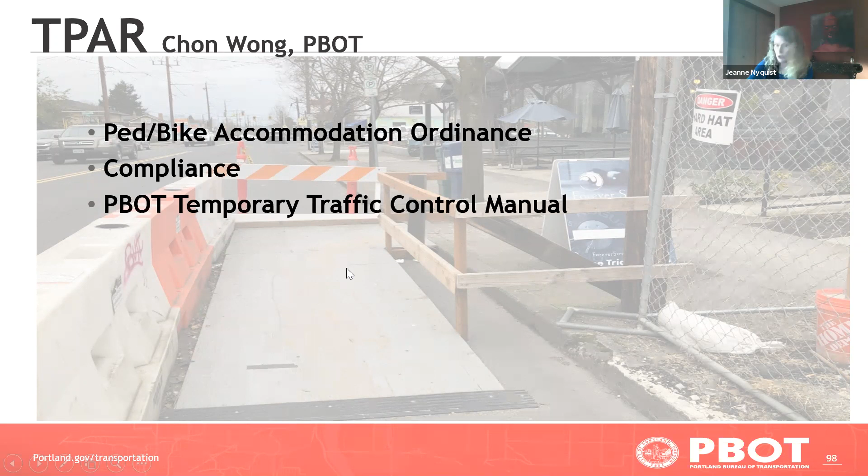Hello, how's it going? Great.